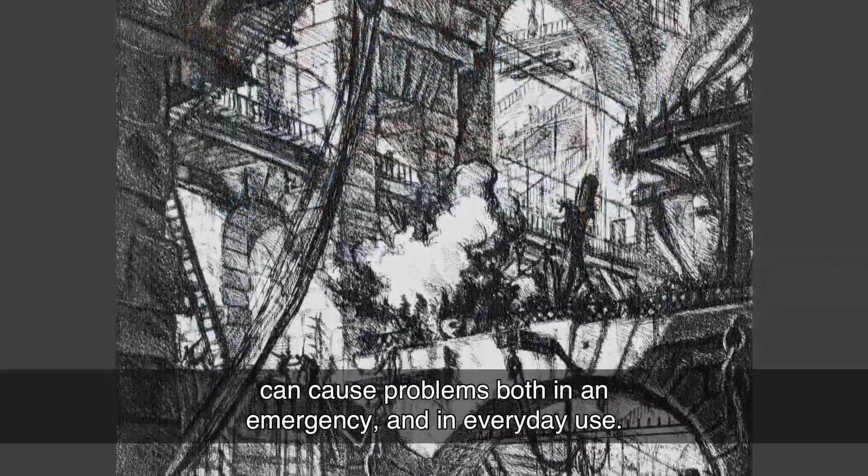At the end of the film, you should be able to calculate occupancy loads, determine sizes and lengths of egress elements, identify dead-end corridors, and understand how previous fire tragedies and human behavior have affected egress safety. Incidentally, good egress, or exiting design, is typically good circulation design for everyday use that is clear and intuitive for users. Complicated and confusing circulation design can cause problems both in an emergency and in everyday use.

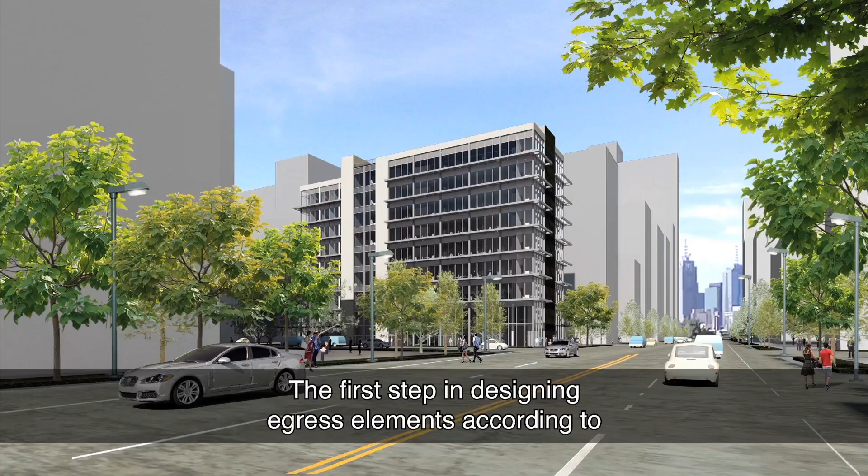Circulation is a system that includes stairwells, corridors, lobbies, and doors, and is integrated with all building systems. If it is well designed from the beginning, people will enjoy the building, and expensive adjustments are avoided. Consideration must be given to users both familiar with the building and those new to the building. The first step in designing egress elements according to code and assessing code compliance is understanding occupancy, or the intended use of a building.

A building can have more than one occupancy. In this building, we have retail with a restaurant on the first 2 floors and offices above those. This is known as mixed use. Factors that affect occupancy classification might include the number of people that would be present in the building at any time, the density of the number of people, what they are doing, how well they are able to react to an emergency, and how hazardous the building may be.

For example, egress requirements for a nightclub that serves liquor and may host a concert with pyrotechnic displays are more stringent than those for a storage facility. The different occupancies or intended uses of buildings and rooms can be categorized. In assembly buildings, there can be large crowds of people who may be unfamiliar with the building. Assembly is subdivided based on the density of the group of people and whether the seating is fixed or not.

Assembly Group A1 usually has fixed seating. Assembly A2 includes uses intended for food and drink consumption. Assembly A3 includes a variety of uses intended for worship, recreation, or amusement. Assembly A4 is for indoor sporting events, and A5 is for viewing outdoor activities. When gathering many people in one assembly space, it is important to accommodate emergency and everyday high-volume exiting in a short time, so the code is more restrictive in assembly uses.

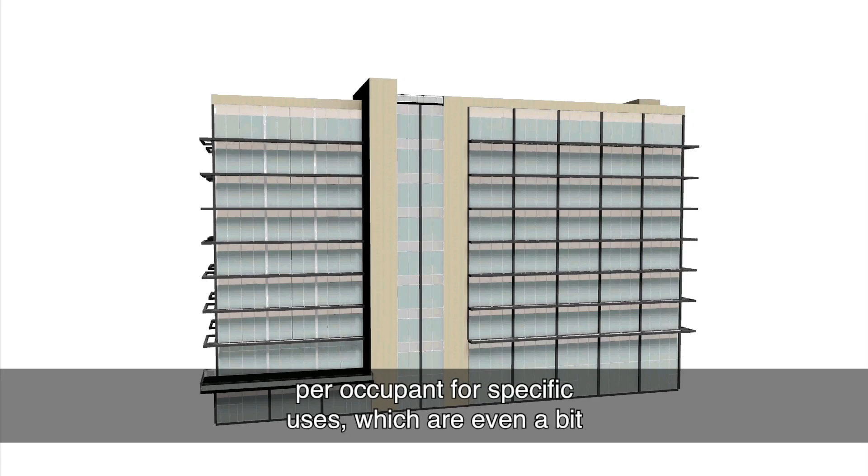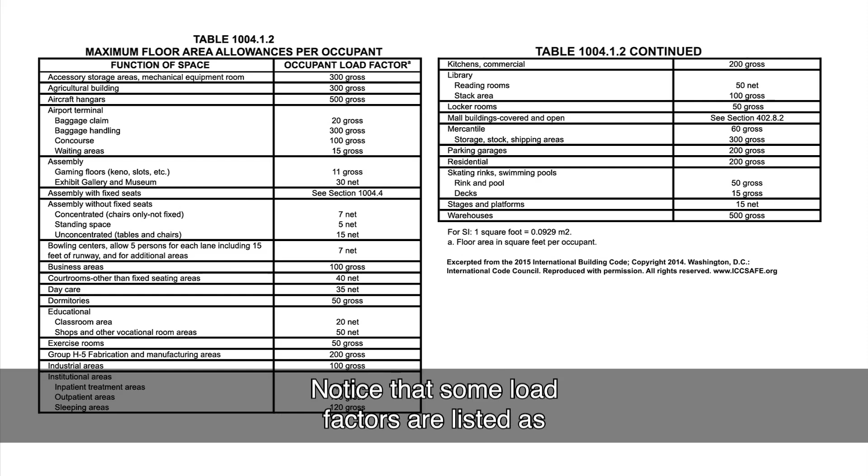The IBC and NFPA 101 tell us the maximum floor area allowances per occupant for specific uses, which are even a bit more detailed than the overall occupancy classification. We find the occupant load factor for each space in the building and determine the designed area in square feet. Notice that some load factors are listed as net and some are gross.

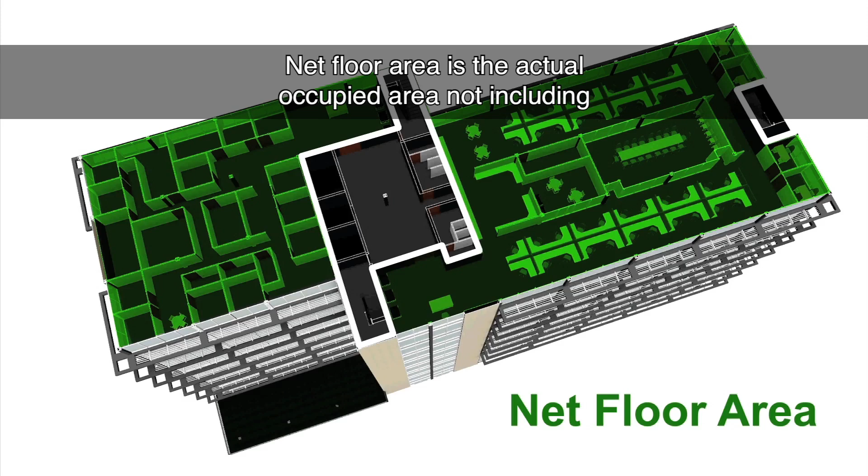The gross floor area is the square footage within the inside perimeter of the exterior walls of the building, minus vent shafts and courts. Include the area for corridors, stairwells, closets, the thickness of interior walls, columns, or other features like a covered ground floor. Net floor area is the actual occupied area not including unoccupied accessory areas such as corridors, stairwells, toilet rooms, mechanical rooms, and closets. It is assumed in net occupancies that the interior walls will not be reconfigured over time.

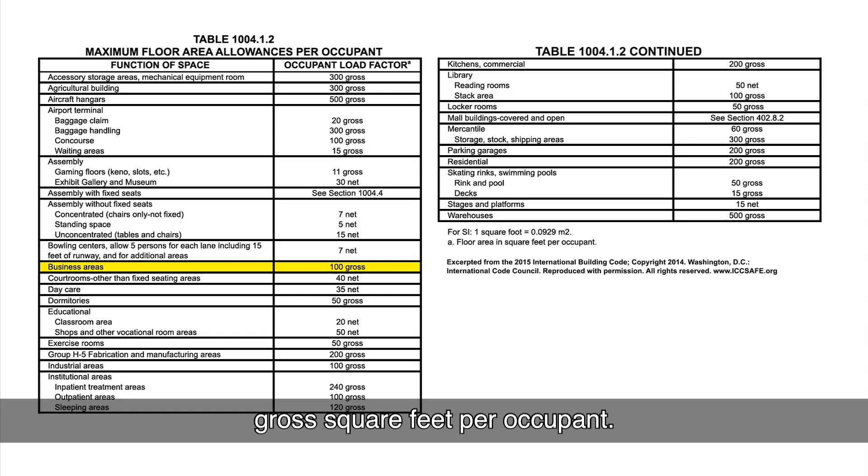In our example, our office space floors are B, or business occupancy. Looking at the IBC, we see that the occupant load factor is 100 gross square feet per occupant. So, one takes the gross floor area and divides it by the load factor to get the number of occupants. So we have 12,650 square feet divided by 100 square feet per occupant, which equals 127 occupants. We round all decimal numbers up.

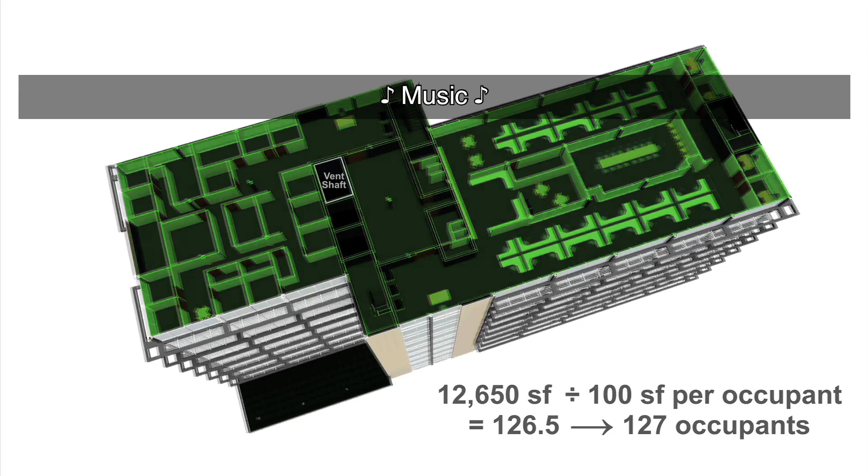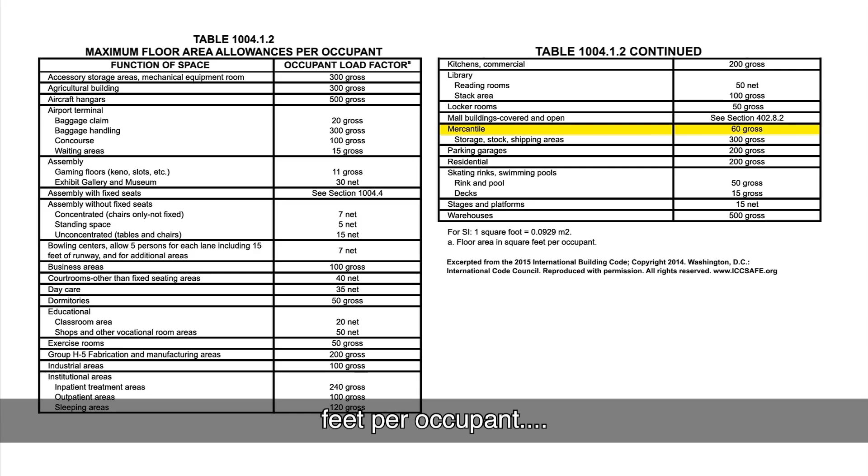This would be the same process for all of the upper office levels. On the lower floors, we have a restaurant and retail stores. Retail is M, or mercantile use. There is an occupant load factor of 60 gross square feet per occupant. So 11,050 square feet divided by 60 square feet per occupant equals 185 occupants for that level.

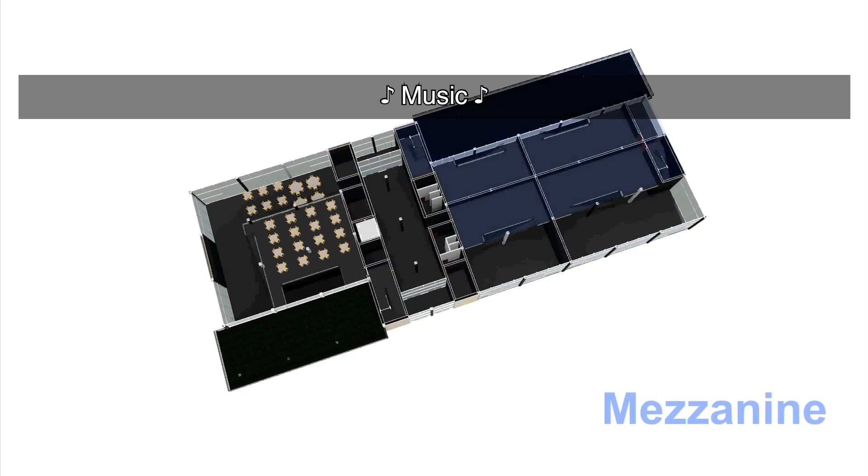In the retail, we also have mezzanines. We use the same load factor of 60 gross square feet per occupant for the mezzanine level spaces. So 6,875 square feet divided by 60 square feet per occupant equals 115 occupants for that level.

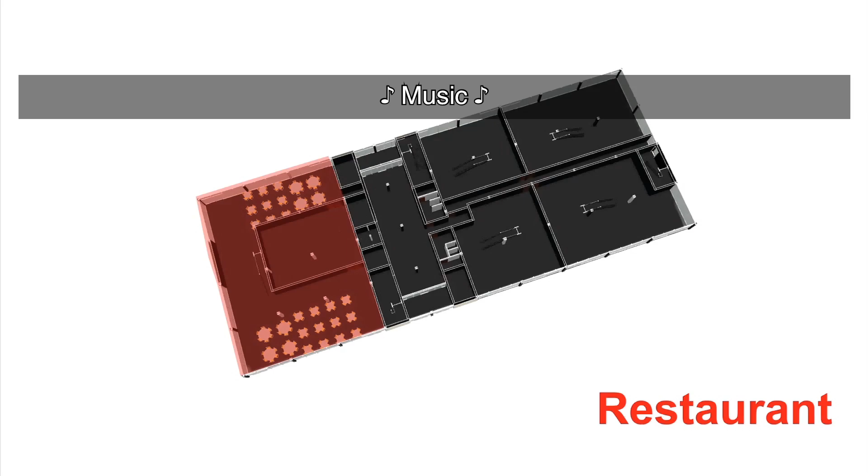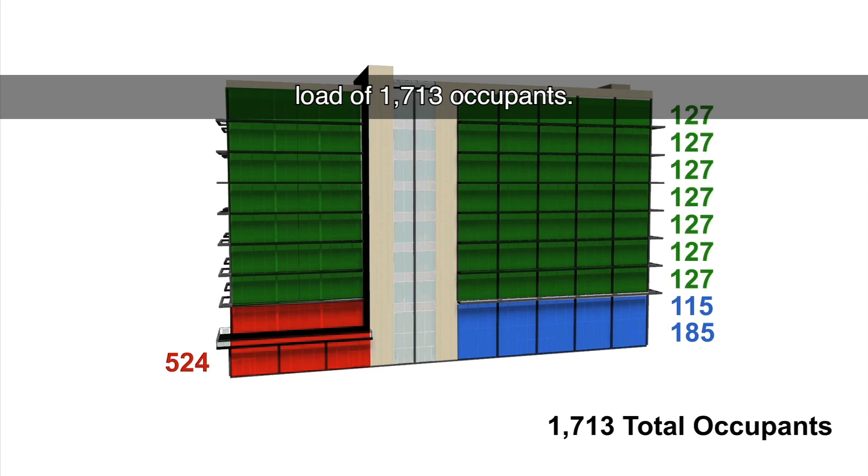For the restaurant, under assembly without fixed seats, unconcentrated with tables and chairs, there is an occupant load factor of 15 net square feet. So 7,855 square feet divided by 15 square feet per occupant equals 524 occupants. Add all of these to get the total occupant load of 1,713 occupants.

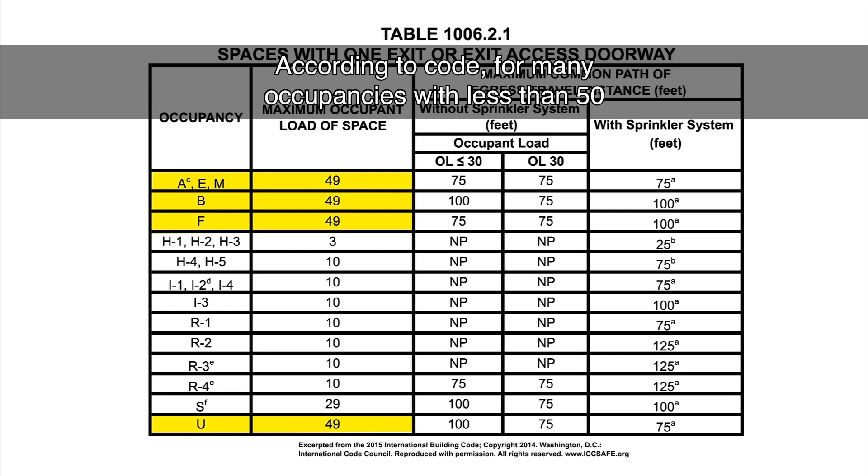The occupant load is a factor that tells us how many exits the spaces and floors should have. According to code, for many occupancies with less than 50 occupants, only one exit is needed. If specifying only one exit, it is important to check for the presence of a sprinkler system and what the common path of egress travel distance is, which we will cover in a few moments.

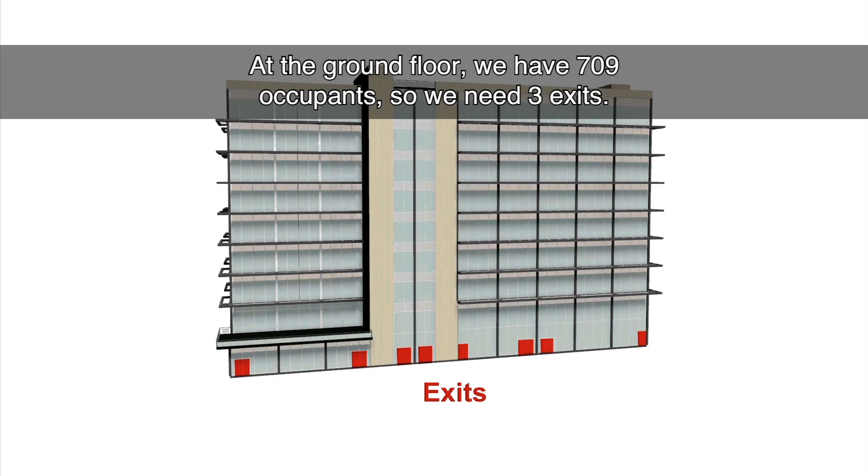In many occupancies, for 50 to 500 occupants, 2 exits are needed. For 501 to 1,000 occupants, 3 are needed. 4 exits are needed for over 1,000 occupants. For some high-rise buildings, an additional stair may also be required. At the ground floor, we have 709 occupants, so we need 3 exits. We have more than that here, but we also need to check that each area and space within the building have the adequate number of exits.

For example, looking at the conference space, it is assembly unconcentrated, so its load factor is 15 net. Dividing the area by 15, we see that there are 53.3 occupants, rounded to 54. Since this is greater than 50, 2 exits are needed out of the room.

So, once the number of occupants and number of exits are determined for each space, travel path safety must be considered. An important rule in the code is that the doors used for egress should always swing in the direction of travel if the occupant load is greater than 50, or it is a high hazard occupancy. Egress doors should never be blocked or locked, although that is too frequently done.

In the Triangle Shirtwaist Factory fire of 1911 in Manhattan, owners locked doors to the exit stairwells to prevent unscheduled breaks and stealing. There were further issues with doors swinging inward and inadequate fire escapes. 146 workers died, many of them from jumping to escape the fire. Although that happened long ago, this event led to important code changes and resulted in the formation of what is now the NFPA 101. Tragically, this problem still exists.

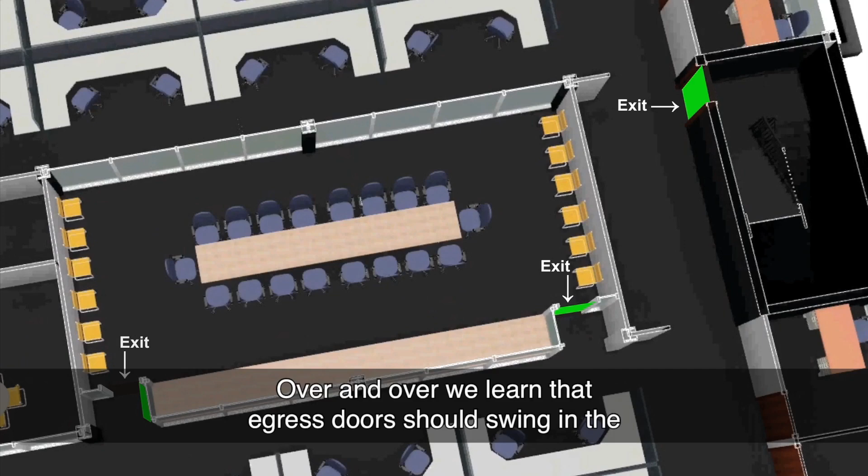In 1991 in Hamlet, North Carolina, at the Imperial Food Processing Plant, dozens of workers again were killed due to locked doors. And as recently as 2012 in Karachi, Pakistan, hundreds of workers were killed due to locked exit doors in the garment factory. Over and over we learned that egress doors should swing in the direction people are moving, and they should be unobstructed. Doors to rooms like offices or others with small occupancies, on the other hand, could swing into the room to avoid disrupting the egress flow of others.

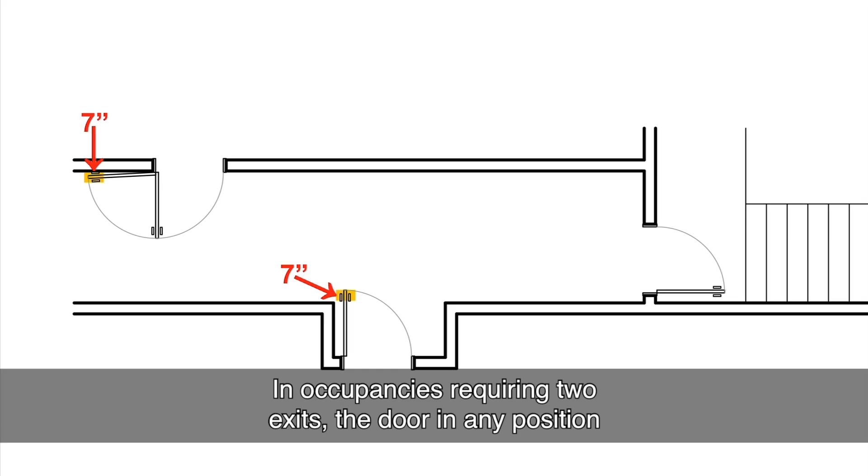When a door swings in the direction of travel, when fully opened, it must not reduce the required width of a corridor or stair landing by more than 7 inches. In occupancies requiring 2 exits, the door in any position may not reduce the egress width by half.

We also need to be sure any person does not need to travel too far before reaching a protected area. We therefore measure the length of exit access travel distance, which is the distance from the most remote portion of the room or floor to the next level of protection, either to an enclosed stairway or outside. Although it is not specified in the code how the measurement is done, we might consider the location of furniture when measuring travel distance. It is most conservative to measure at right angles.

Studies show that adults walking by themselves can be expected to move at approximately 1.2 meters, or just under 4 feet per second. However, speeds can be much slower if the density of people increases or when people are on stairs.

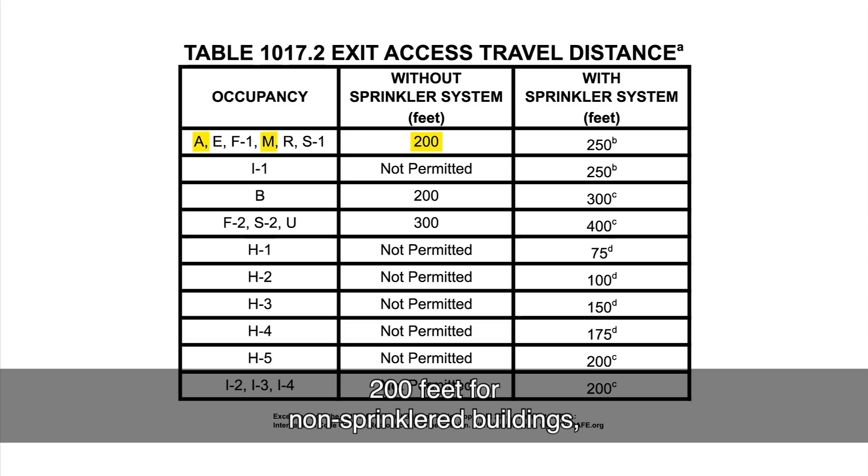For occupancies A and M, the maximum travel distance is 200 feet for non-sprinklered buildings, 250 for sprinklered. For B, it is 200 feet for non-sprinklered and 300 feet for sprinklered. As we see for travel distance, there are multiple code requirements that can be reduced when an automatic sprinkler system is installed. The codes recognize that an automatic sprinkler system limits the growth of a fire and gives more people time to escape.

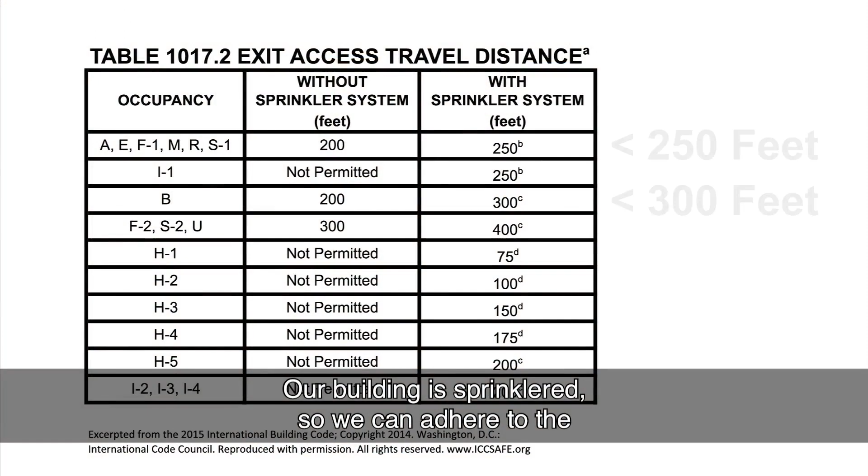However, the sprinkler system is only specified to control the fire, not necessarily extinguish it. The egress system must work efficiently in order to make sure that all people get out safely. Our building is sprinklered, so we can adhere to the longer travel distances.

The common path of egress travel is the portion of exit access in which the occupants are required to move before two separate and distinct paths of egress travel toward two separate exits are available. In other words, it is the distance before they have two options out. Common paths of egress travel shall be included within the overall travel distance. For buildings with only one exit, all of the exit access is a common path of travel.

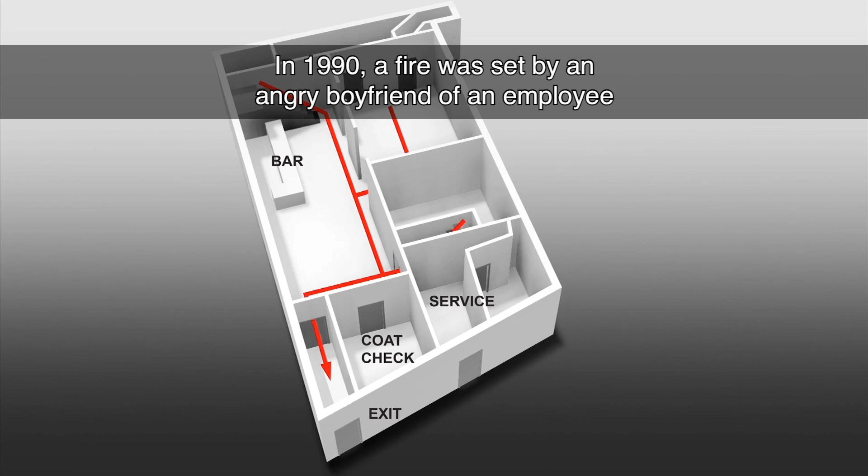In the Happy Land Social Club in New York, there was only one designated exit. In 1990, a fire was set by an angry boyfriend of an employee near the only available exit, preventing people from being able to evacuate. 87 people died, many very quickly of smoke inhalation. People need options in case an exit is unusable.

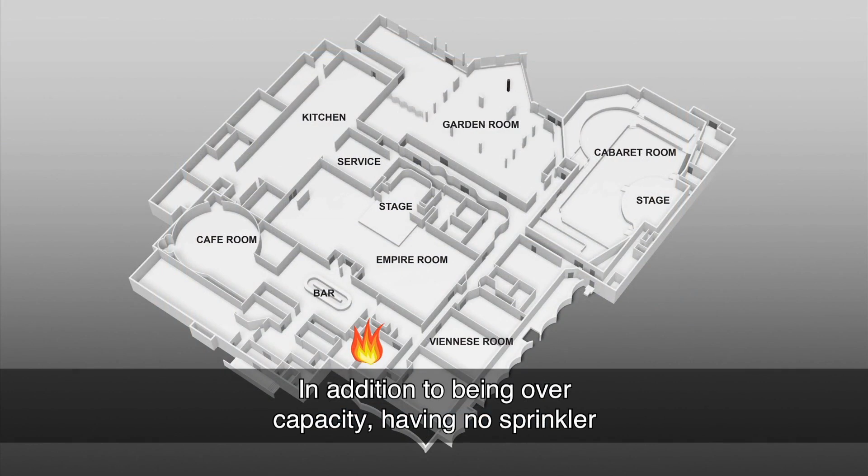The Beverly Hills Supper Club fire of 1977 in Southgate, Kentucky demonstrates the importance of having clearly organized egress. Estimates report that as many as double the amount of allowed people were in attendance at the time of the fire. In addition to being over capacity, having no sprinkler system or fire alarm, and having flammable decor, the egress in the club wasn't adequate.

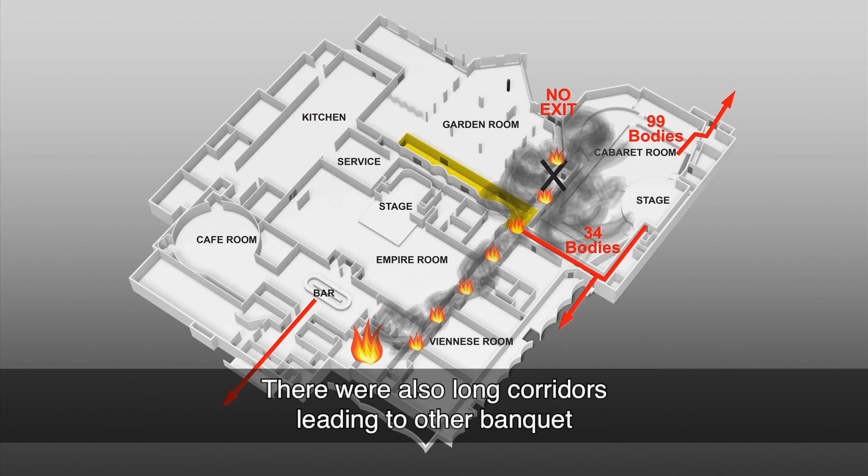Here we see where the fire started and the exits people used. The fire spread quickly, rendering one exit useless, while the remaining exits in the cabaret room were unmarked, not numerous enough, and not wide enough. There were also long corridors leading to other banquet rooms and unmarked exits. 165 people died, and over 200 were injured.

A dead-end corridor is one which does not lead to an exit. The code restricts the length of these to 20 feet. An important exception is that in many occupancies, if a sprinkler system is used, the length of the dead-end corridor can be up to 50 feet. In our example, B and M may take advantage of the exception, but the A2 occupancy, the restaurant, may not. The idea behind this is that it is unsafe for occupants to move down a path that doesn't lead to a protected area, as we saw in the Beverly Hills Supper Club example.

We can see in the graphic that not only is this confusing, but it is dangerous in situations with large groups of people. We must imagine how quickly emergencies can happen, and how disorienting it can be trying to find a way out. By the time that a fire alarm is activated, there can be areas within the building where egress may not be possible.

Even with sprinklers, one may have smoke from a fire, a loud alarm, and emergency lighting only. People report moving through smoke even when they cannot see the exit. People unfamiliar with the building will typically go back the way that they came in, and if forced to go another way, will try to guess which way the exit is when they cannot see it.

To illustrate the importance of these points, we will look at a couple more devastating nightclub fires that help to define standards in the code. As previously mentioned, nightclubs are particularly vulnerable buildings in terms of code. They hold an assembly of people who are potentially consuming alcohol within a dark, tight space. They have tight security that controls access in and out of the club, and they have performances that can involve hot lights and pyrotechnics adjacent to flammable materials.

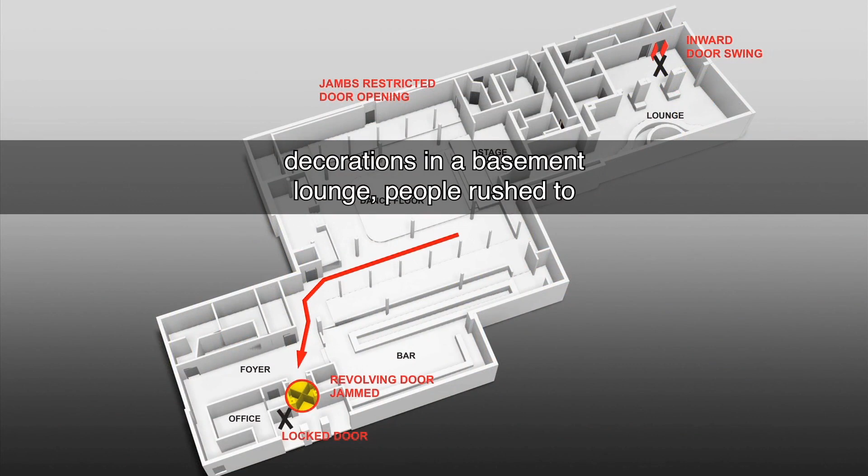When the fire started by something igniting the decorations in a basement lounge, people rushed to the main entry, which was a revolving door. It became jammed, and the fire spread quickly, limiting people's time to find another exit. The other exits were either locked to prevent people leaving without paying, or the door swung inward, so the crush of people rendered it useless.

It caused reform to portions of the code to require outward swinging doors, to restrict the bolting of doors and blocking of exit signs, and to require a revolving door to have an outward swinging standard door adjacent to it. Revolving doors should also collapse in the direction of travel for clear passage in an emergency. More recent nightclub fires, despite the code changes and awareness, had similar issues.

The Kiss nightclub fire in 2013 in Brazil killed 242 and injured over 600 people. It was overcrowded with inadequate exits. Someone lit an illegal firework inside that ignited acoustic foam in the ceiling. Most of the victims died of smoke inhalation. The Station Fire of 2003 in Rhode Island killed 100 and injured 230.

Once they said Great White was going to be taking the stage, it truly was body to body, shoulder to shoulder. You couldn't turn around, you couldn't twist around. There were a lot of people. Great White came out, Jack Russell said a few words, trying to get the crowd going, and they started into the song Desert Moon, and all of a sudden the pyrotechnics went up.

Because of where we were standing, Fred had said to me, "Look at that, something's wrong. There's a fire, there's something on fire." And there was a fire exit, maybe 3-4 steps to our right. And Fred just grabbed my hand and we went over to the fire exit. We got to that fire exit and there was a bouncer standing in front of the door. And Fred is screaming, "There's a fire, open the door, there's a fire." And the bouncer just stood there and said no, the door was for the band only and that it was club policy.

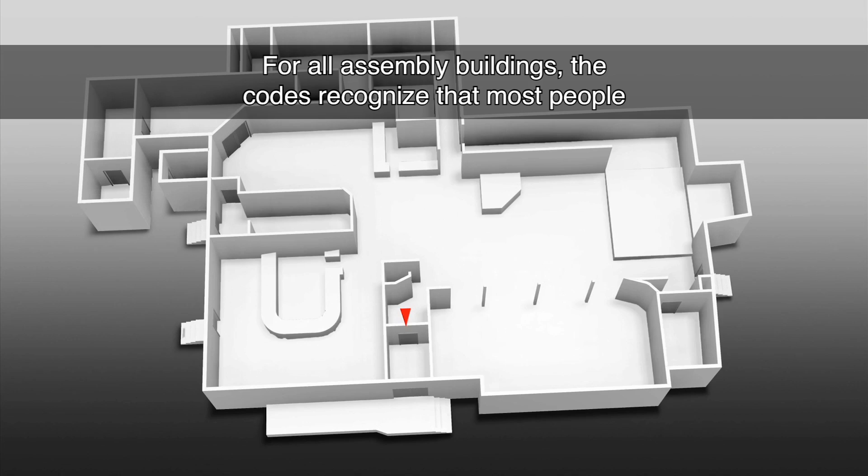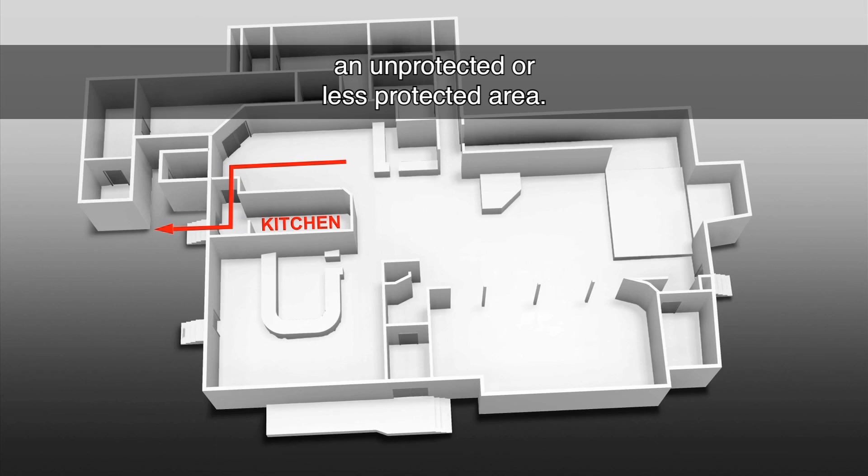Thus, the main entrance must accommodate at least half of the people in the building. In a nightclub and similar buildings, this is increased to 2/3. Generally, from any point in a building, all users must move toward an increasing level of safety. They cannot be in a protected area and move to an exit through an unprotected or less protected area. Storage rooms, closets, kitchens, or machine rooms are not considered protected areas.

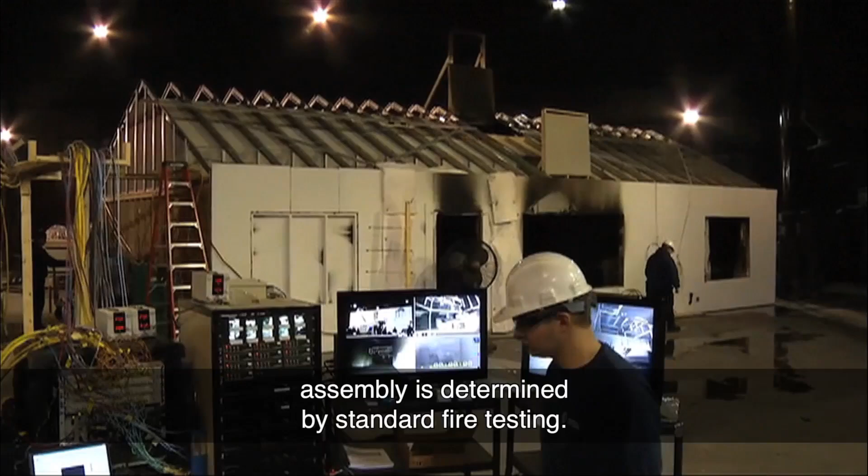Modern synthetic materials burn hotter and faster and can contain hydrocarbons, many forms of which are used as fuel sources that can emit carbon monoxide and cyanide. The level of performance of a wall, ceiling, floor, or door assembly is determined by standard fire testing. Materials and assemblies are tested by the Underwriters Laboratories, Factory Mutual, or a similar testing laboratory.

There are many factors that play into the intensity or danger of a fire, including the flammability and toxicity of the furnishings and the construction materials, openness of the space, or origin of the fire. It is important to protect the integrity of the egress system, and to separate uses like parking garages that may pose a threat to more protected uses like residential. Separation is achieved with the UL-rated assemblies.

What about sizing the components of the egress system? It is important that the width of the egress elements, exit doors, corridors, and stairs accommodate the number of occupants. These are simple calculations based on the number of occupants, or occupant load, that we determined earlier. Before we do that calculation, we will consider a couple of concepts. First, one must consider the occupant load of each floor to determine the width of the stairs. We assume that the flow down the stairs is steady.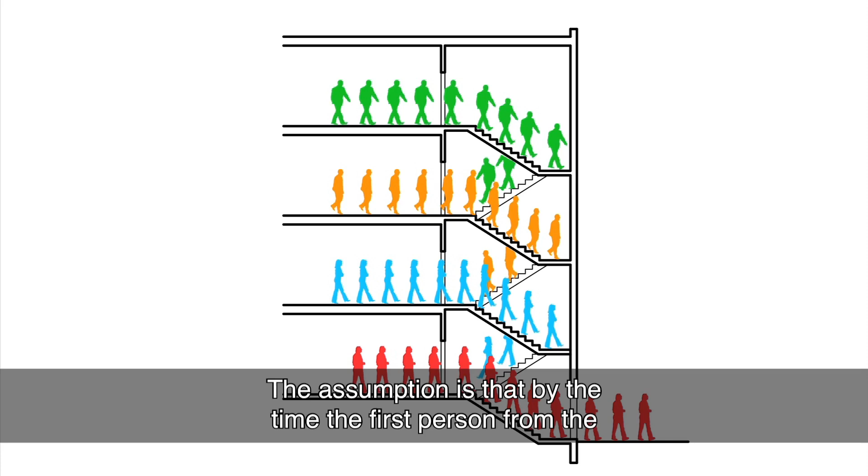The stairs cannot get smaller as they go down, but they do not necessarily have to increase for each floor if the occupant loads per floor are the same or smaller. This is based on the movement of people down a stair. The assumption is that by the time the first person from the floor above gets to the next floor down, most of the people on the floor have already started down the stairs. There is no limit to the height of enclosed vertical egress stairwells as they are needed for high-rises.

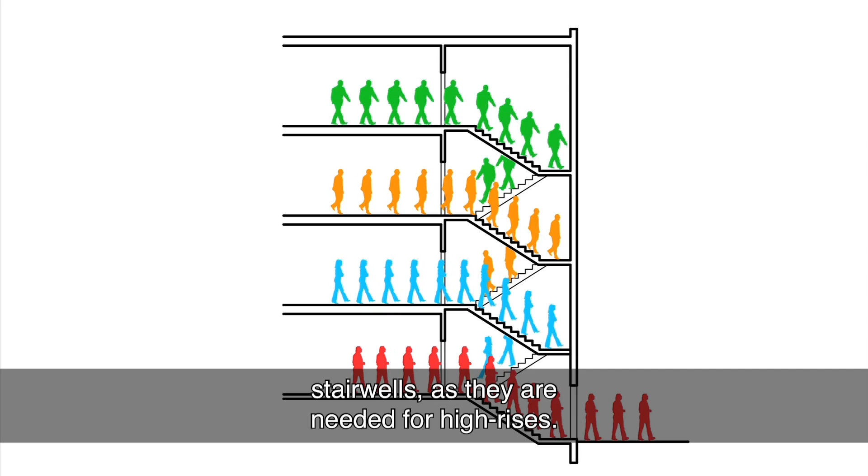In cases where the occupancy loads are higher on upper levels, the stair width all the way down must be sized for that larger occupancy. If there were a large occupancy load from an assembly space, for example, on the third floor of a building, the width of the stairs would need to accommodate that number of people until they exit at the bottom, even if the occupant load of the second floor were small.

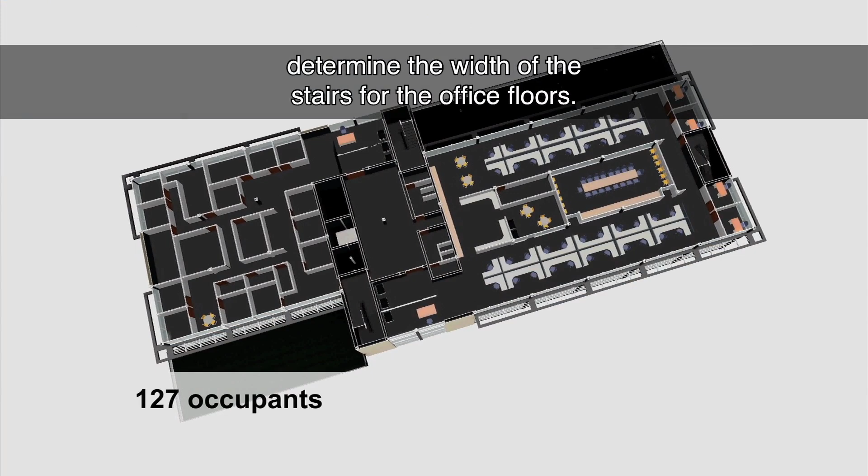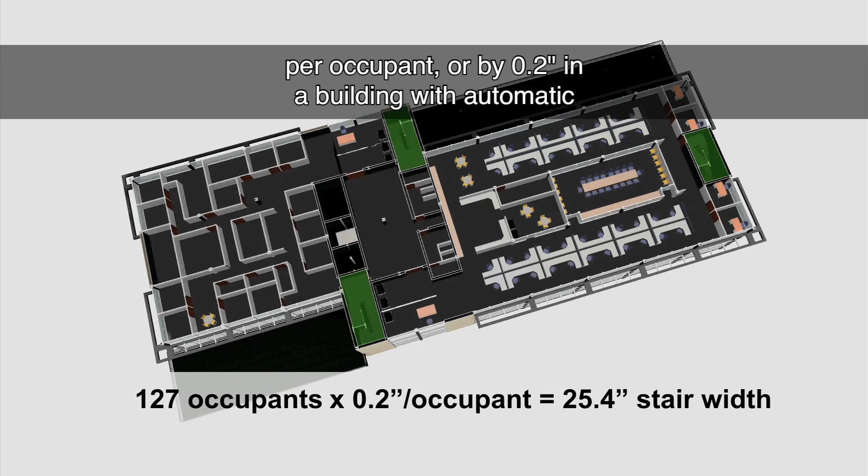Second, and conversely, one must increase the width of egress elements like corridors as occupant load flows merge. It's like two rivers merging to become a wider waterway. Looking at our example's occupant loads, we can determine the width of the stairs for the office floors. To calculate the egress width of stairways, not the overall stairwells, but the stairway area people walk within, we simply multiply the number of occupants of each floor by 0.3 inches per occupant, or by 0.2 inches in a building with automatic sprinklers and an emergency voice and alarm communication system per the IBC.

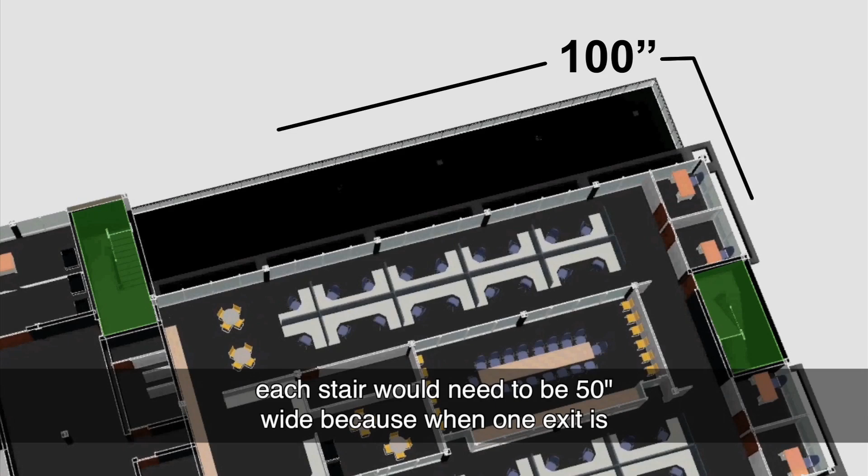We get 25.4 inches. 44 inches is the minimum width for stairs by code for occupancies greater than 50, so we will use 44 inches. If 2 stairs are required, distribution of egress capacity must be provided. If one exit is lost, the other stairway shall not reduce capacity to less than half of the required capacity. This means if the egress width were calculated at 100 inches, each stair would need to be 50 inches wide because when one exit is blocked, the others must still account for 50% of the occupancy. If there were 3 or more exits provided, then the widths can be different for each exit and add up to 100 inches.

The calculation is similar for the corridor width, except the multiplier is 0.2 inches per occupant or 0.15 inches with the sprinkler exception. We use the occupant load of 300, which includes the mezzanine load, from the retail floor. This is greater than the 44-inch minimum, so we will use 45-inch minimum width.

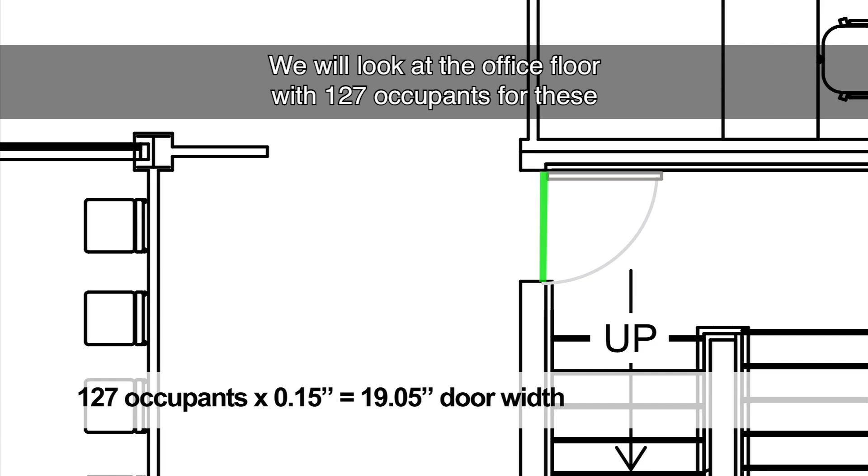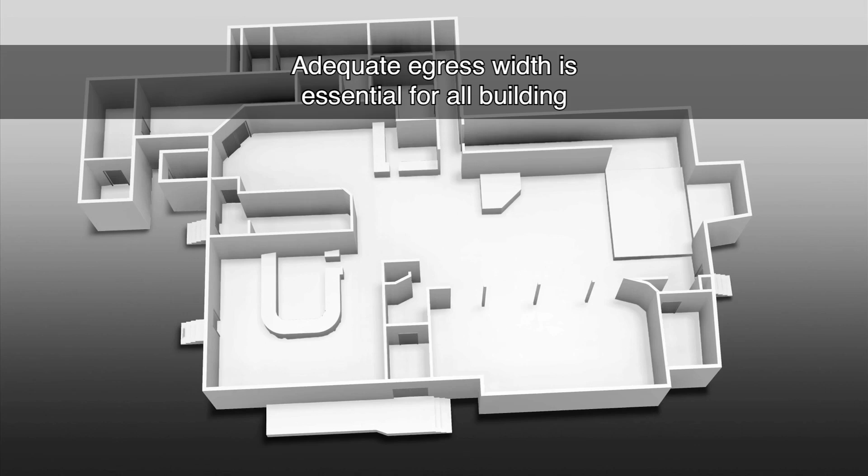For the door width, again the multiplier is 0.2 inches, or 0.15 inches for sprinklered. We will look at the office floor with 127 occupants for these door widths. 19 inches is well below the required 32 inches clear minimum, which is usually achieved in a 36-inch wide door in the open position. Adequate egress width is essential for all building components in order to ensure that people can safely egress the building. Undersized doors in the Station nightclub fire led to a blockage of people in the door as they tried to escape.

Adequate width is important for entering buildings and enclosed spaces too. In Cincinnati in 1979, an insufficient number of open doors at a concert led to the deaths of 11 people as people pushed towards the entrance to get into the concert. Similarly, at a 2010 festival in Germany, 21 people died from crushed ribs and more than 500 were injured when a ramp between tunnels where people entered became overcrowded.

In addition to adequate width and number of exits, for spaces and buildings needing more than one exit, there must be a remoteness or separation of exits per the codes. If one exit is compromised by fire, smoke, or something else, occupants must have one safe alternative at a distance from that exit. The exit doors must be a distance apart equal to not less than 1/2 of the length of the maximum overall diagonal dimension of the building or area to be served, measured in a straight line between exit doors or exit access doorways. If the building is sprinklered, as in our case, the distance can be 1/3 the diagonal.

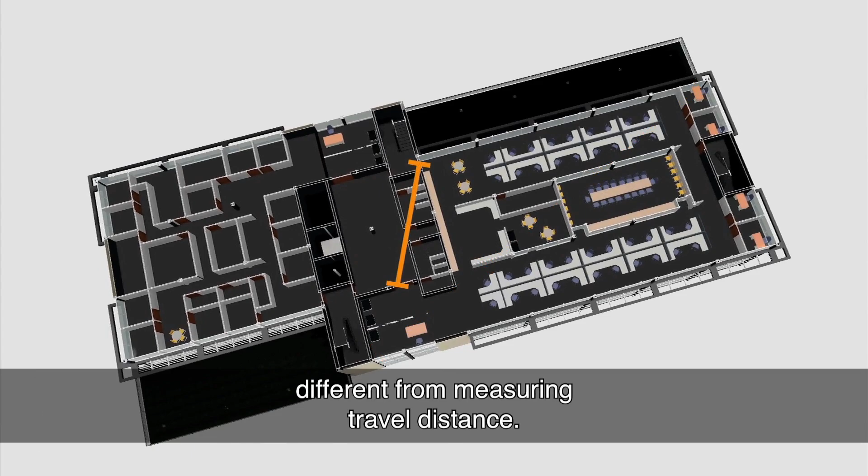Do the same thing for the overall office area. We measure the distance between the center of exits most conservatively as a bird would fly over a plan drawing, different from measuring travel distance. Let's review more case studies.

Within the code, there are many variations and exceptions based on a building's structure and material, and as previously mentioned, its occupancy classification. Special consideration must be taken when the occupants are not familiar with their surroundings, are hindered in the ability to escape, or are sleeping at the time of an emergency. The MGM Grand Hotel fire of 1980 in Las Vegas highlights the fact that smoke inhalation is a more serious threat to life than flames.

Even though the fire department was located across the street and responded very quickly, the fire grew too fast. The main problem in this fire was that there were openings in the vertical elevator shafts, and the structural seismic joints that provided a vertical path for the smoke that started in the lower levels to reach the upper hotel levels where the majority of the 87 fatalities occurred.

Since that fire, what has the hotel industry and the building industry basically done to rectify situations like that? Number one, full sprinklers. That is just the basic tenet for a good fire protection program. It's been proven for well over 100 years, and it was just proven again. But it would really hit home with the hotel-motel industry at that time.

Purchasing of furnishings and products that are used in the hotel: furniture, interior finishes, usually coming from a central supply house or central purchasing. And hotel-motel managers started paying a lot of attention to that because they had to provide fire-safe materials. Obviously, the huge changes it made in Nevada to the entire hotel industry and the upgrades that had to be done, especially the retrofit of their existing hotels with sprinklers.

If we take a contemporary elementary school that is equipped with a sprinkler system, we can go through the same process as our mixed-use example. First, we identify its occupancy.

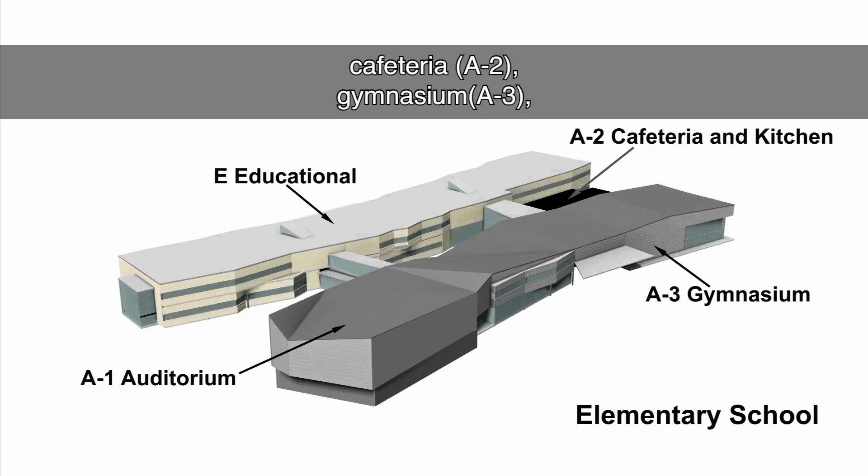The overall building has an educational occupancy, but we have some assembly spaces: the auditorium, A1, cafeteria, A2, gymnasium, A3, and library, A3. We also have business area in the offices, mechanical rooms, and storage. A question to be answered here is whether these spaces are used only by the school children and faculty during the day, or if other groups can come in and use the spaces while students are occupying the building.

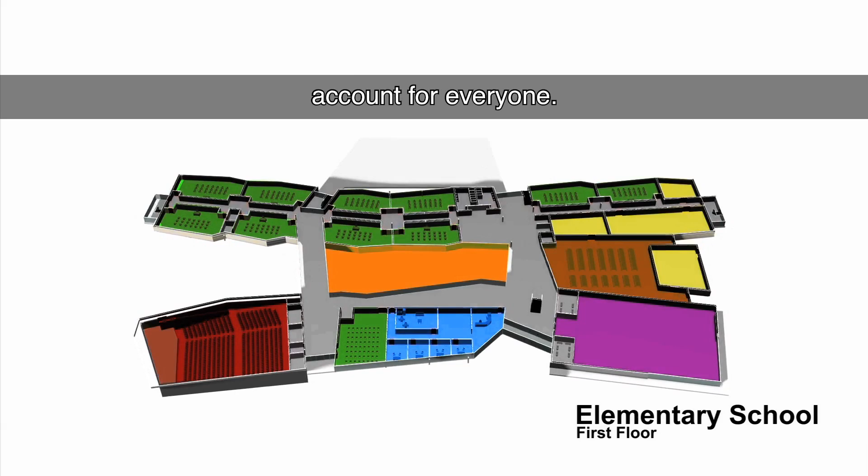If it is expected that outside groups will use the space while the classes are in session, then the total occupant load has to account for everyone. If it is only the children and faculty using the spaces, then each individual space must be designed to accommodate the maximum number of people that might be present. Code officials can help interpret this calculation.

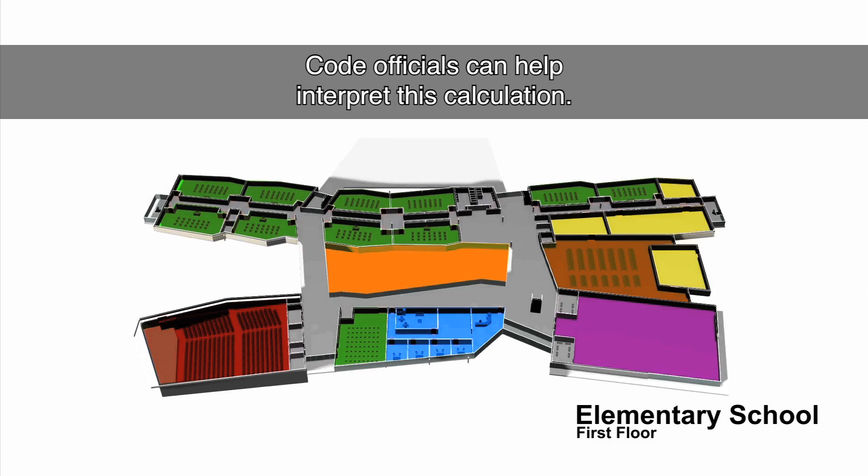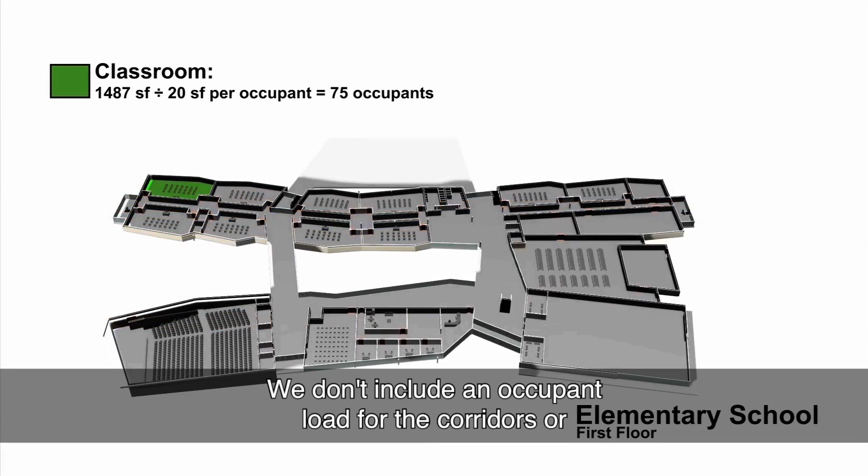We will assume in our example that outside groups cannot use the assembly spaces during school hours, so we will calculate the occupant loads of classrooms separately from the assembly spaces. Based on the areas of these spaces, we can calculate the occupant load using the same process we used in the previous example. We don't include an occupant load for the corridors or bathrooms due to the fact that educational is net.

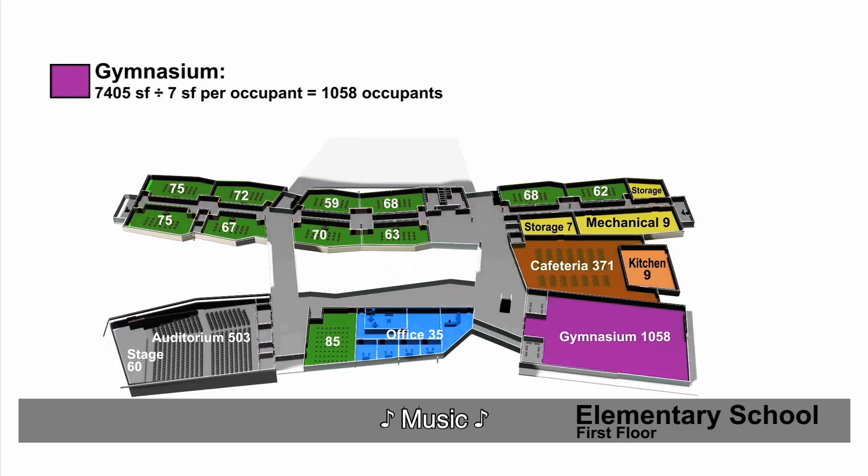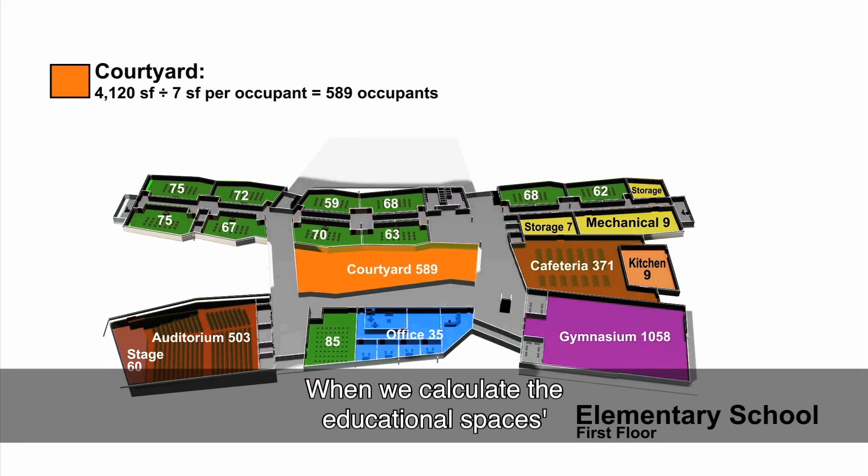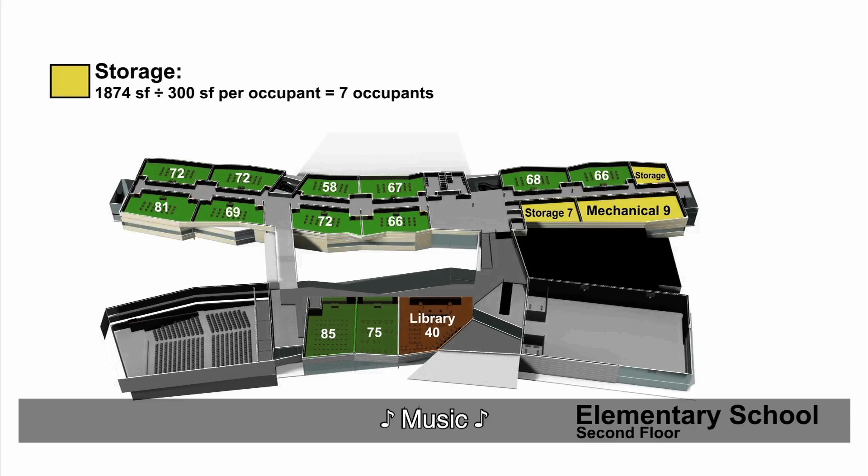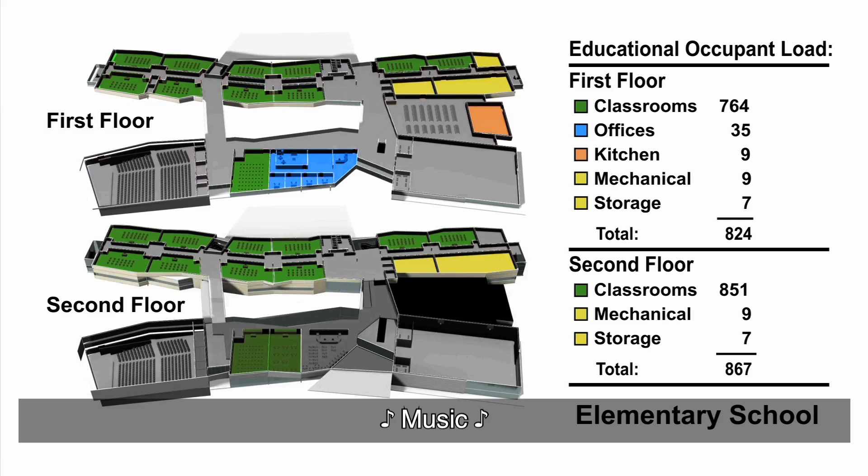When we calculate the educational space's occupant load, we won't include the load for the auditorium, cafeteria, library, gymnasium, or courtyard because we assumed these spaces would not be occupied while the students were in school. We will then compare it to the occupant load of the assembly spaces that can be used by the public. Note that this would be the worst case maximum load, indicating simultaneous use of all the assembly spaces. We will use the greater number to determine the exiting.

Our first floor occupant load is higher for the assembly spaces with public access, so be sure to have adequate exiting based on those occupant loads and types. Our second floor occupant load is higher for the educational spaces, so we will use that number for exiting from the second floor. Based on the number of occupants on the first floor, we determine the minimum number of exits, which is 4. And then we will check each area needing more than one exit.

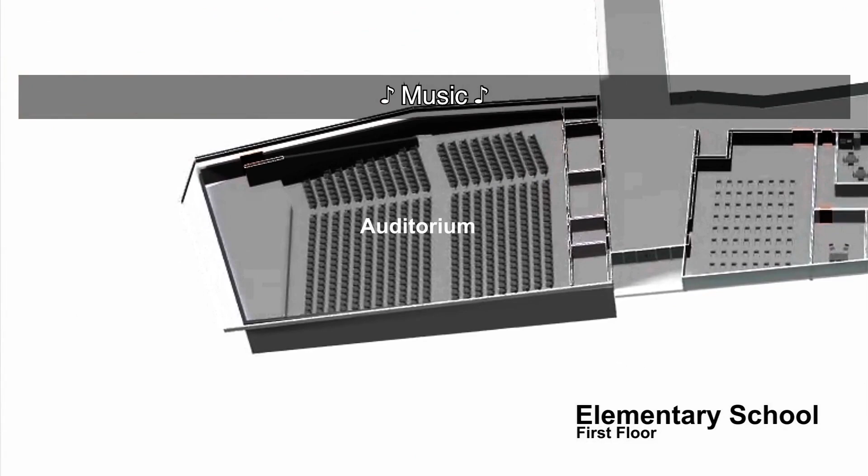In a case like this, some will consider this only as 3 exits, because 2 are close to each other. We could separate these. The auditorium is a special case we will review in a moment. Let's do a quick check of the remoteness or separation of exits. We'll start on the second floor.

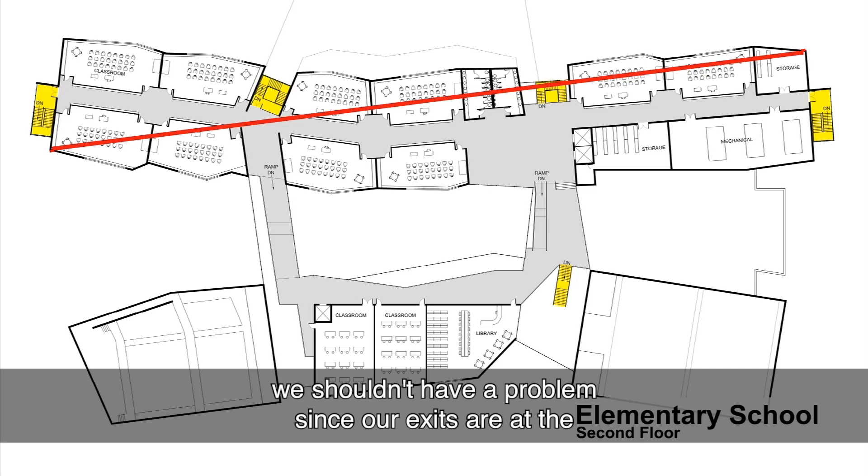Check the overall plan remoteness of exits. We shouldn't have a problem since our exits are at the opposite ends of the building and at intervals between. Check the remoteness of exits in specific areas and rooms requiring more than one exit. We'll do the same for the ground floor.

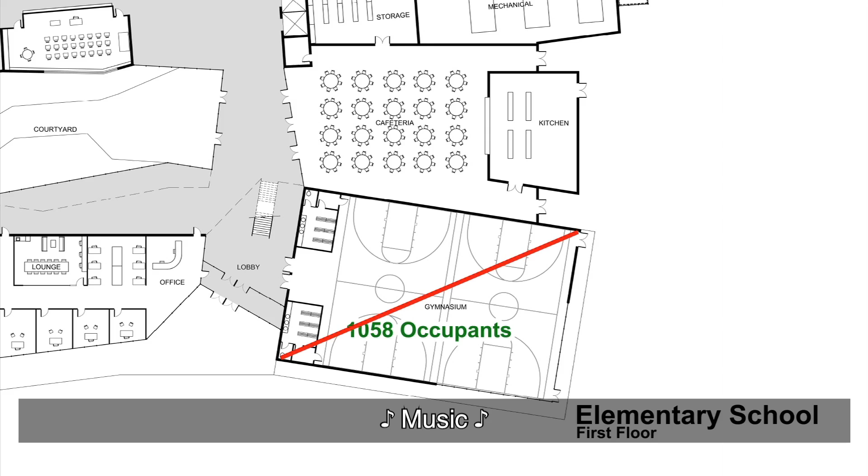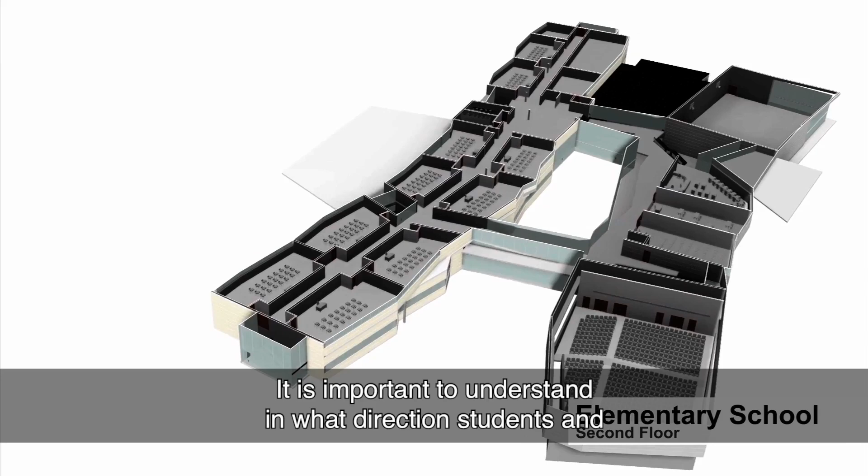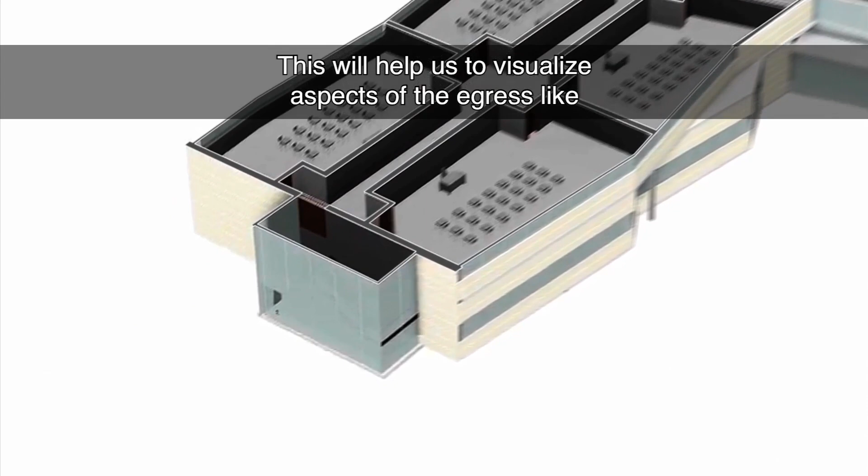It is important to understand in what direction students and faculty will be moving from each space, through the exit access, then through an exit to an exit discharge. Again, there should be options in occupancies requiring 2 or more exits when people are in the exit access, in case one option is blocked or compromised. This will help us to visualize aspects of the egress like common path of travel and travel distance, and to determine which direction exit doors should swing.

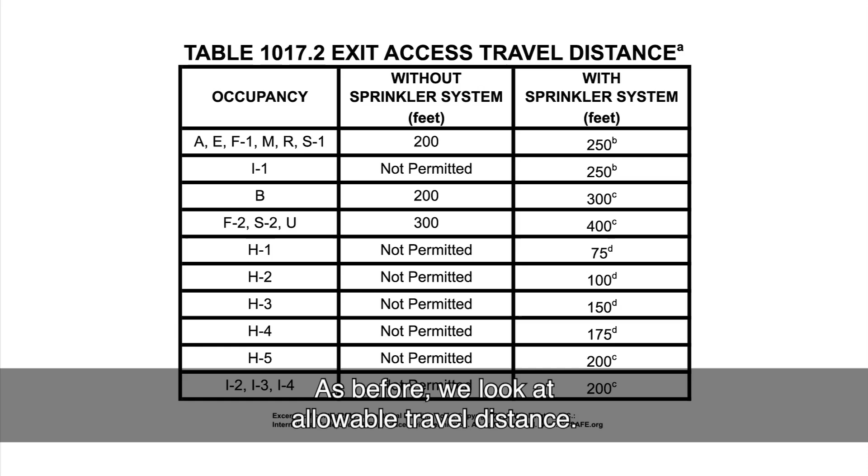In this example, we will verify the length of the common path of egress travel. With our occupancies, we are permitted 75 feet. We take the remote point and measure to the point at which 2 path options are available. Note that this distance is included within the overall travel distance. As before, we look at allowable travel distance. For education and assembly, it is 250 feet maximum for a sprinklered building. We have an exit from the most remote point within 250 feet. We do a check that dead-end corridors are less than 50 feet.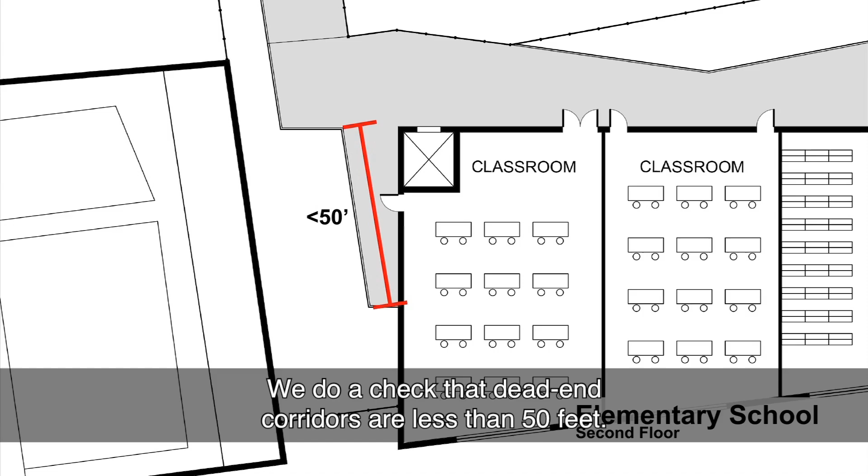In this building, we have open stairs, but we have 3 enclosed fire stairs for fire exit access. It is allowed to use open stairs in a few cases, but it is recommended to provide enclosed stairs. Escalators are not considered an emergency means of egress, and elevators are only allowed as accessible means of egress if there are more than 4 stories above or below the exit discharge.

Now we can verify the required width of stairs by multiplying the second floor occupant load times 0.2 inches per occupant. We take the 174 inches and divide it by 3 stairs to get 58 inches for each stair. This is more than the 44-inch minimum, so we will use 58 inches.

The corridor width is the occupant load times 0.15 inches, which equals 130 inches. For educational group occupancies greater than 100, the minimum is 72 inches. Ours is wider, so we will go with the wider 130 inches, or 10 feet 10 inches.

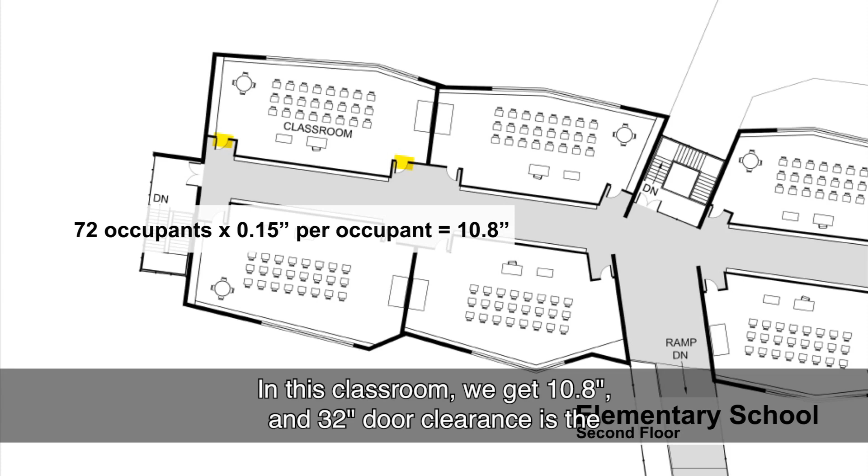The width of doors is determined for each area by multiplying the occupant load times 0.15 inches. We have 3 doors, so each one should be 43.3 inches wide. We get more than that by having 2 doors at each exit. This should be done for each space. In this classroom, we get 10.8 inches, and 32 inches door clearance is the minimum, so we will go with 32 inches.

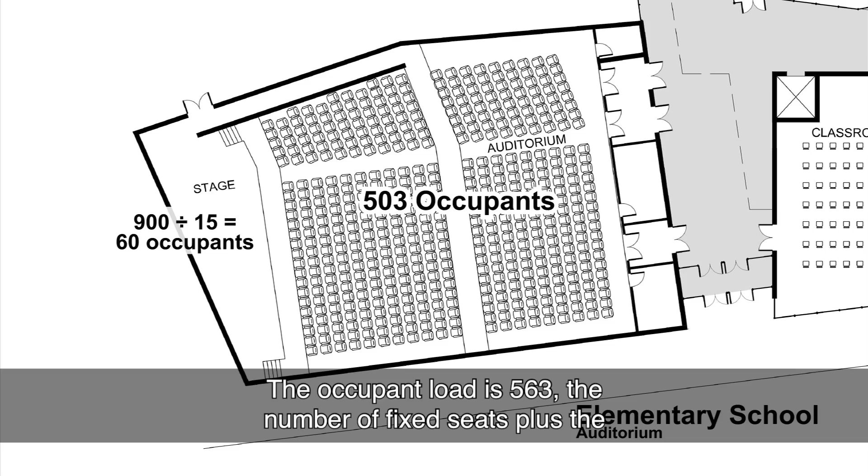Let's take a look at one of the assembly spaces in a bit more detail, the auditorium. The concepts are the same, but the requirements are more specific. The occupant load is 563, the number of fixed seats plus the net area of the stage divided by 15. This means we need 3 exits. We check the remoteness in plan. We meet separation.

There are many options in seat and aisle layouts that are covered in the code. In our example, we have 3 aisles that serve the seating in the back and 2 aisles in the front. Aisles serve as the exit access in this space, similar to how corridors serve rooms or spaces. Our aisles and floor are ramped at a slope less than 1 to 12, or an 8% slope, and there are no balconies.

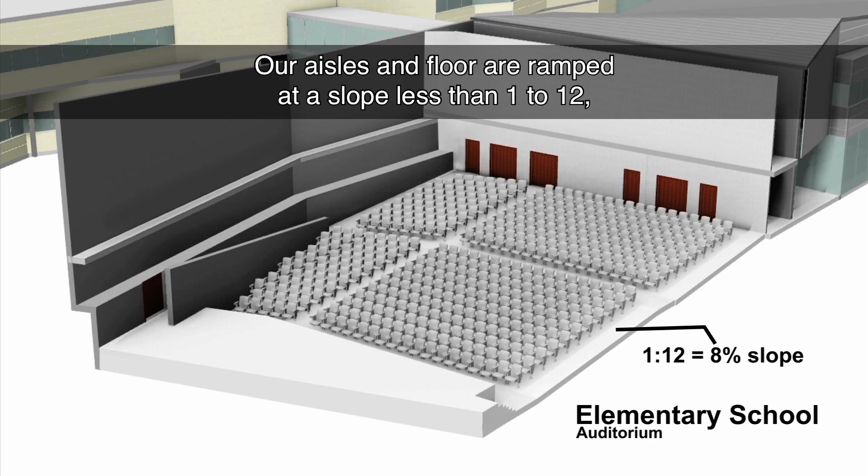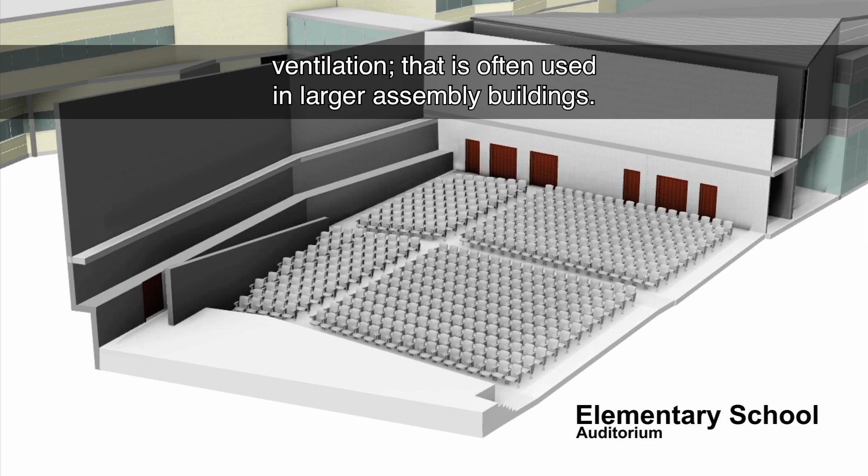In this relatively small auditorium, we will assume we do not have an expensive smoke protection system with automatic ventilation. That is often used in larger assembly buildings. Let's consider travel distance. It is still 250 feet because it is sprinklered. It is measured within the aisles and aisle access, not over any seating.

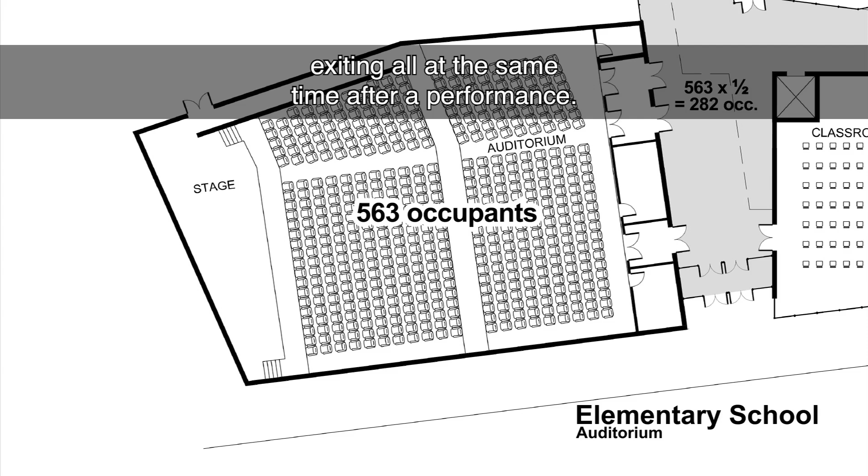Since the occupant load is above 300, the IBC and NFPA 101 note that the entrance door width should be sized to take at least 1/2 of the occupants, because this is the most familiar exit. This is good practice in any case, since the crowd is usually exiting all at the same time after a performance. The other 2 exits should handle 1/3 of the occupants each.

When added together, it actually totals more than the calculated occupant load, but some duplication ensures that a large crowd has some options. For door width, take the occupant load times 0.15 inches per occupant. In any vestibule, be sure to have 48 inches between doors in the open position.

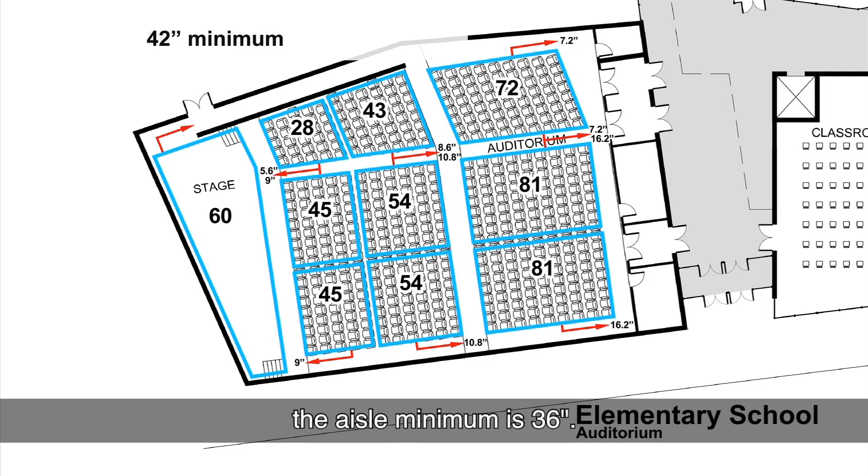To calculate the aisle width, consider where the people will be exiting. Use that area's occupant load and multiply that times 0.2 inches per occupant, the factor for aisle width. For a ramped aisle with seating on both sides, the minimum is 42 inches, unless the aisle serves less than 50 seats; then the aisle minimum is 36 inches. Remember to read all of the exceptions.

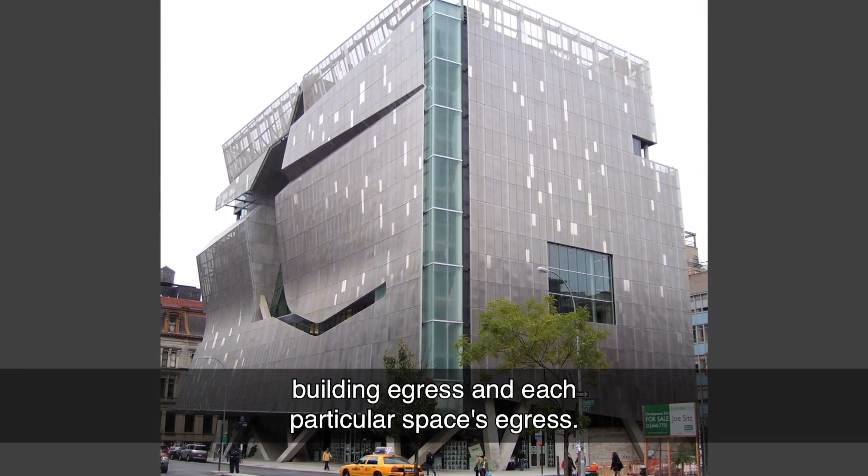Generally, the process is to consider both the overall building egress and each particular space's egress. We have covered the basics of emergency egress that are best incorporated early during design. Changes made late in the process can be very time-consuming and costly. Clear and efficient circulation system design that incorporates an understanding of people's experience will incidentally provide good egress.

It is important to realize the origins of and concepts behind the code standards, but each project needs to be researched, particularly for local amendments. Code officials can help with this and should be partners in the design process. The better we all understand the spirit of the building and of the code and communicate clearly, the better we can navigate some of the gray areas of the code that need to be interpreted.

In every project, there are a variety of solutions. We are all designing to protect the health, safety, and welfare of society, not just building owners. This involves an intimate knowledge of the standards related to each building's use. The standards are a result of case studies, testing, and the study of human behavior in a building.

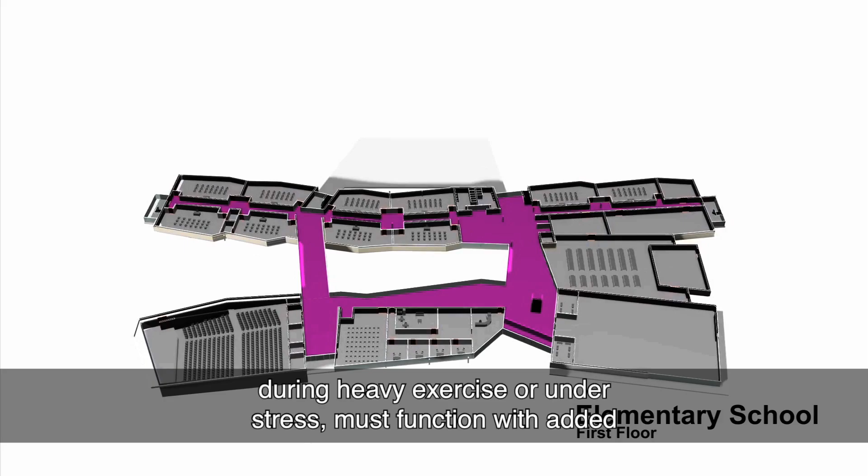The circulation system within a building should consider the interaction of people, wayfinding, and formal relationships of spaces. It can contribute to the efficiency of a building and the well-being of its users. It is like the human circulatory system that keeps our bodies functioning well on an everyday basis. An emergency egress system, like a human circulatory system during heavy exercise or under stress, must function with added flow and pressure, working efficiently with other building systems. Good design results in good emergency egress.